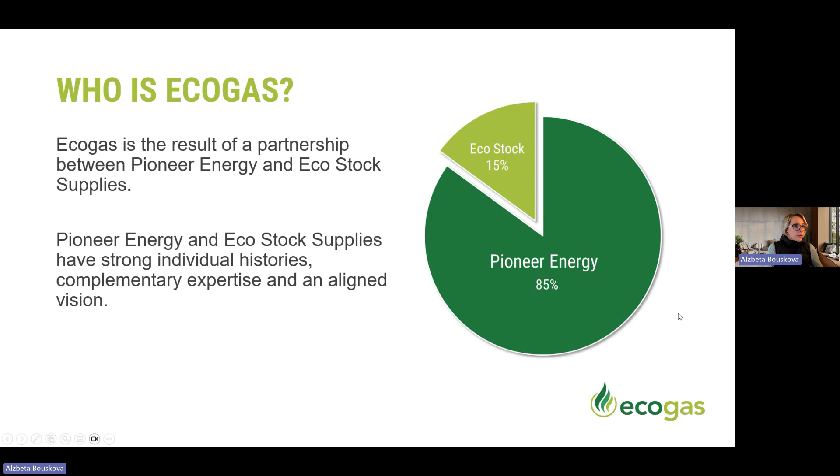So what actually is anaerobic digestion? Anaerobic digestion is a very ancient process, and it's very similar to what's happening in cow stomachs, but essentially it takes organic waste, food waste, and a rule of thumb here is anything that you would feed to an animal or a human. So that excludes wood. Not many animals actually eat wood. So anything green, or that has been produced by animals or grown, is put through this process of anaerobic digestion.

That's a biochemical process, and the process is very clever because it is able to convert 95% of the latent energy in that food into biogas, and essentially retain all the good stuff, the nutrients and the trace elements that the food contains, which is converted into a liquid fertilizer. So an extremely efficient process.

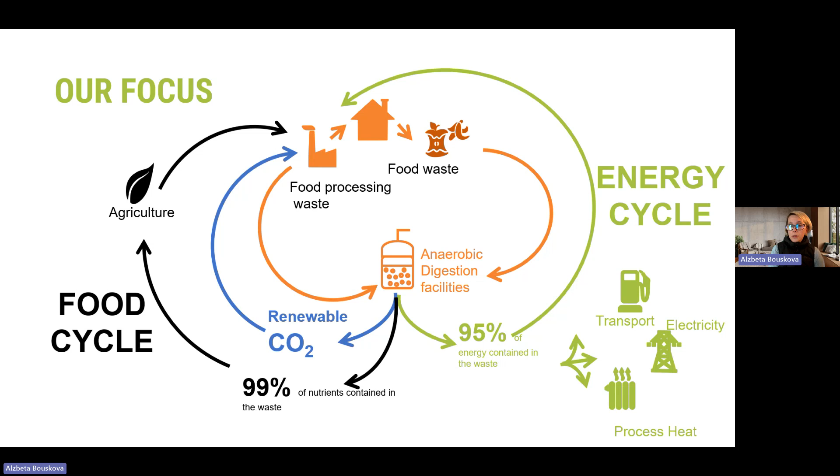And the biogas is a very flexible fuel and can be used in multiple ways: upgraded to transport fuel or electricity, or directly used in process to generate heat. And bio CO2, or renewable CO2, is also a byproduct of the digestion, and can be used as well to replace fossil-derived products.

So what anaerobic digestion essentially does is it really shifts the dial from our BAU process, which is essentially landfilling. When food waste goes to landfill, it produces greenhouse gas emissions, converts into methane with a similar type of bacteria as the anaerobic digestion. But because landfills are open until they are finished and you can cover them, all of this methane essentially percolates through the landfill and gets released into the environment.

We have made some transition into composting. So composting sort of avoids the landfill emissions to an extent, and produces compost, which is obviously a valuable product. And where anaerobic digestion plays a good role is that it shifts the dial even further into the avoidance space, because it produces liquid fertilizer and it produces biogas, which can then be used to replace fossil-derived products and create that avoidance space.

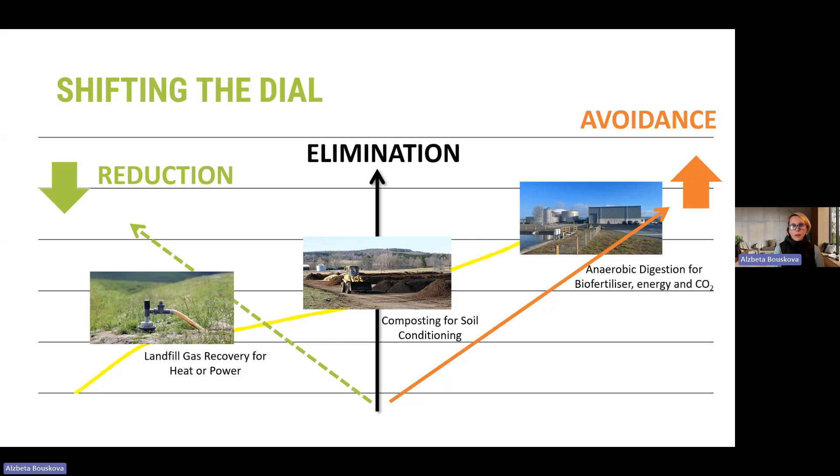And one thing that is really fascinating about anaerobic digestion is that it sits at the intersection of 3 different sectors: the environment, the energy sector, and the agricultural, the primary production. And as fascinating as it is, it's also probably a weakness of the process, because regulators or policymakers usually play in their own sector, and it's very hard for people who set policies to step out and really look at it holistically and say, right, we need renewable gas, but for that to be enabled, we need waste to produce the renewable gas from, and they have to cross the boundary of their own sector into the other sector.

So anaerobic digestion professionals have always struggled with conveying the message, because people often look at it from one lens, and they miss out on the other attributes and the other benefits, which makes perhaps anaerobic digestion less attractive, unless you look at the whole spectrum.

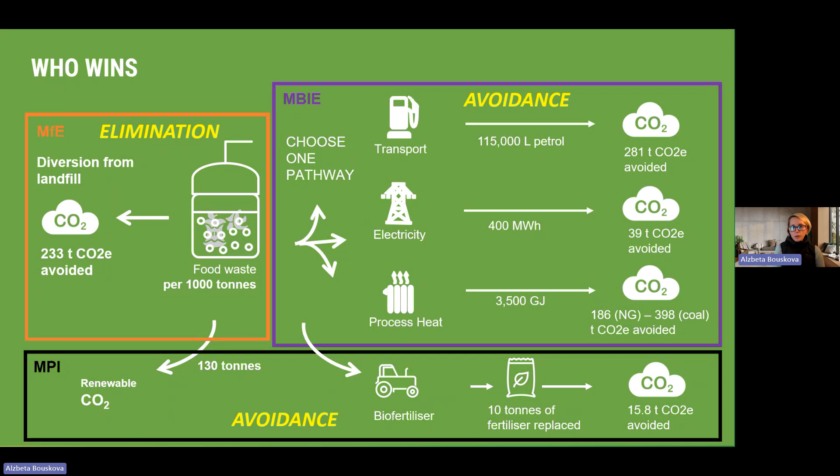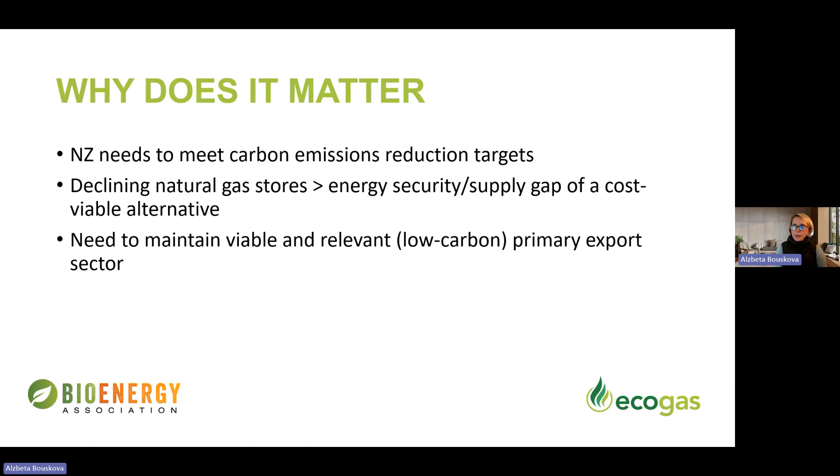And so why does it matter? Why does anaerobic digestion matter in the New Zealand context? We've got some serious emission targets to meet, and I've seen the lineup of people that were registering for this webinar, so I wouldn't be telling you how to suck eggs when you know that the natural gas stores are depleting, and we need a viable alternative. And also for our primary industries, we actually need to transition to a more circular and lower carbon economy for our primary producers to remain relevant on the global market. And so these I see are the 3 key drivers for why I believe anaerobic digestion should be considered more seriously.

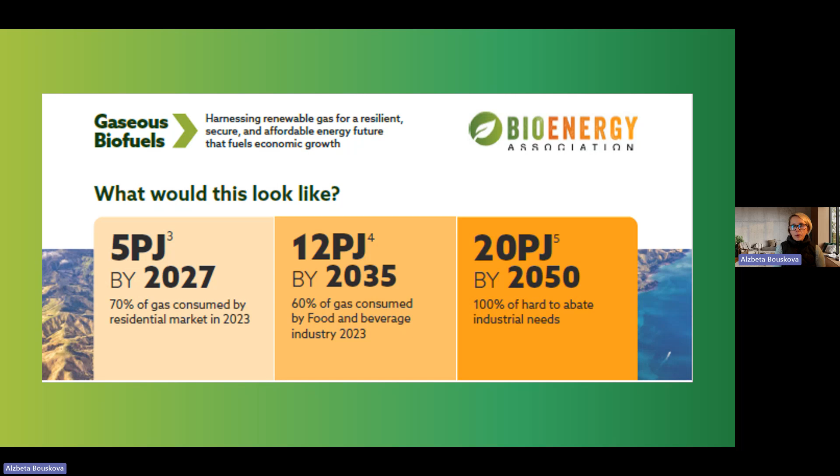And we've done some work with the Bioenergy Association to quantify what the potential is. And we believe that realistically there's a minimum of 20 petajoules of renewable gas that can be produced. We split it into 3 stages, and with some serious actions from the 3 different sectors, and a little bit of a tailwind from the government behind us, I believe we can seriously achieve these targets.

A little bit of a trip into the history. Not many people know that New Zealand was one of the first countries in the world that was converting biogas into vehicle fuel. Back in the 1960s and 70s, the government set up a research group down in Dunedin and Invermay that were tasked to convert agricultural waste into vehicle fuel. So they were running the first biogas upgrading machines and running tractors and vehicles on biogas essentially.

I find that a fascinating fact, especially when you then look at how the world has embraced this technology and run with it, whilst New Zealand kind of stayed behind or was left behind with all this amazing development early on. But what really drove the uptake of anaerobic digestion in the world were subsidies. A lot of the countries recognized that in order to build that biogas market, they will have to incentivize the market through subsidies.

And the biggest driver for biogas production in the world is the production of renewable energy. Whether it's renewable electricity or renewable gas, it's the energy aspect of it. And so a lot of countries, UK, Germany, put subsidies on the renewable energy produced from biogas plants, and that really drove the big growth of the sector.

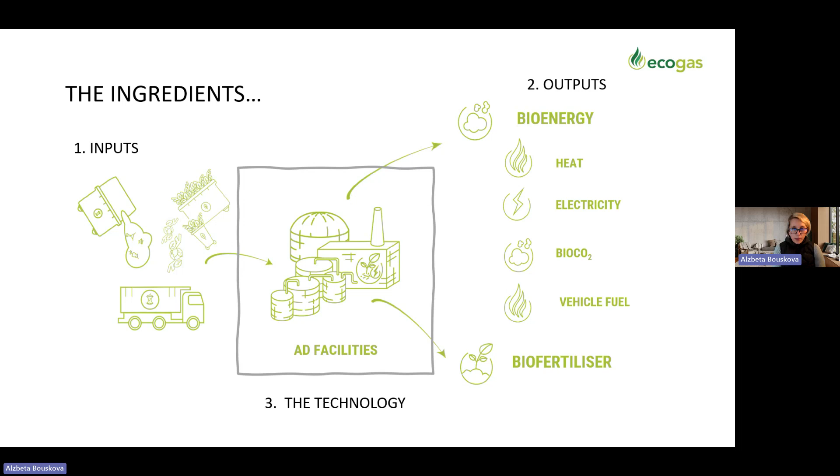What makes or breaks a successful AD project is actually having a security of supply of the feedstock, and then having a security of offtake for the products that the plant produces. And as we mentioned, there's the bioenergy sector, there's the energy sector, and then there's the fertilizer space as well. So globally, I spoke about the subsidies. A lot of the countries put a lot of weight on the outputs, and that's how they drove the uptake of anaerobic digestion.

In New Zealand, on the other hand, the business case kind of stands and falls on the inputs and being able to charge a gate fee for the inputs that are being processed in the plant. Probably 2/3 of the business case will be around the gate fees, and the energy and the fertilizer will be in the last third. And it actually underpins why we haven't had anaerobic digestion plants built for the last how many decades.

It's essentially because the landfill disposal cost historically has been extremely cheap, and it's only been in the last few years that the landfill levy has increased and landfill disposal cost has increased to a level where a medium-sized plant can compete with those gate fees. So at this stage, with the landfill levy increasing, I dare to say that we finally reached the tipping point where business cases for anaerobic digestion plants can be built on gate fees lower than what landfills are charging for commercial food waste.

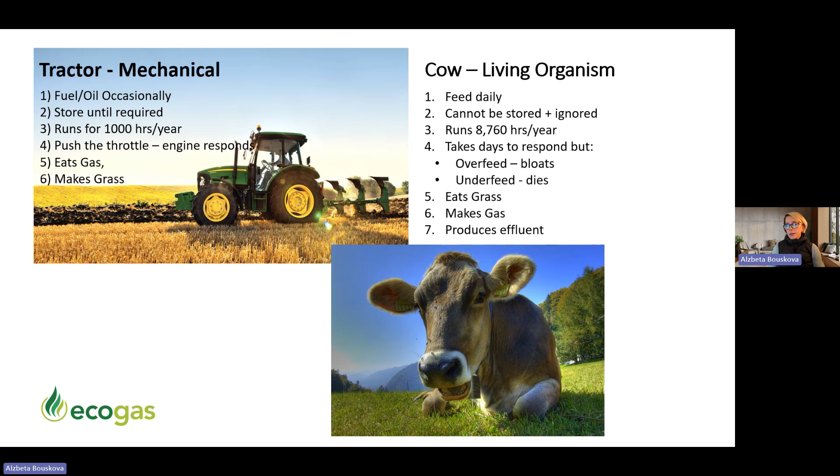And so it eats food and it makes gas and it also produces effluent. So I think the parallel is actually very matching in this case, and it kind of shapes the way you need to think about what you would bring into your plant as a feedstock and how you're going to deal with the products, obviously. It's a very powerful system.

So the methane producing organisms are actually one of the oldest microorganisms on the planet. They've been around for millions of years, and they survived all the different eras, and that's what has made them the way they are. They are very slow bacteria, but they don't need much energy to sustain themselves. They take 5% of the energy from the food that they process, and the rest is excreted as biogas. So they're very low energy needing,

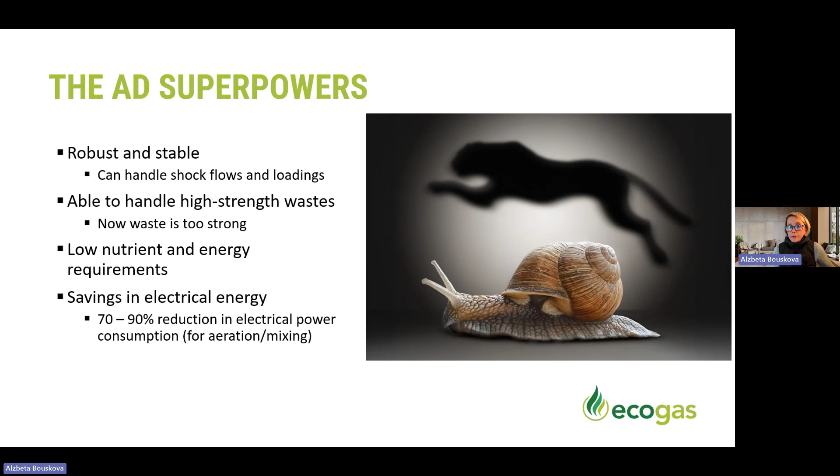and they don't need much to sustain themselves, but they are very powerful in that they can process very concentrated waste and turn that into useful products. And I'll keep carrying on with this parallel with the cows, but anaerobic digestion is essentially a 3-stage process which has to run in complete symbiosis for the system to work.

So the first step is hydrolysis, where the solid waste breaks into liquid components, and the next stage is acid formation, where the liquid components get broken down into volatile acids or organic acids. And then in the third stage, the methanogens take the volatile acids and turn them into biogas.

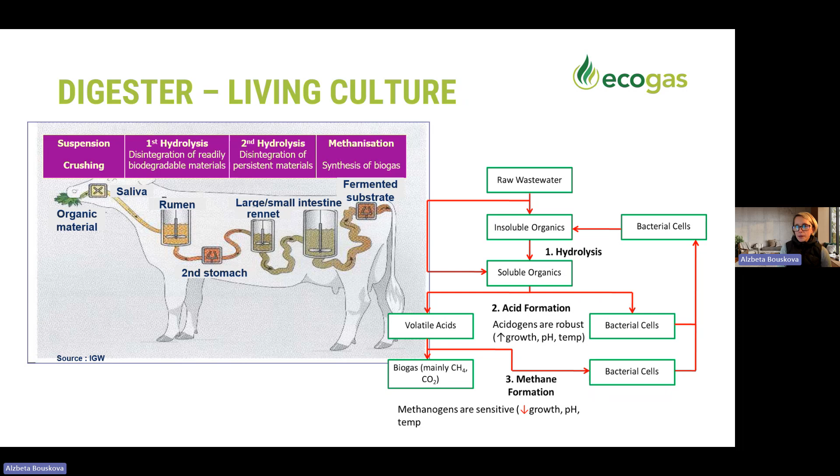And if you look at the cow, your mouth is the first part. When the food waste comes into the plant, you have to macerate it. You need to turn it into a slurry, that's what happens in the cow's mouth, and then it goes into the rumen and into the stomach. And at the back end, you obviously get the gas, and you get the effluent. So it's really important to understand that it's a 3-stage process, but you need to keep that process in balance. And the way you do that, I suppose we'll talk about a little bit later.

To give you a bit of a taste for how much energy different feedstocks contain. Fats can produce the most amount of gas per ton of dry matter. Fats produce about 3 times as much gas as protein or carbohydrate, so residual fats are what you will get the most out of. There's a limit to how much fat you can feed into the system, a little bit like humans, but we'll touch on that later. And then food waste has got a high gas yield as well, and then it moves towards the likes of green waste, which has got a lower gas yield.

And what's almost surprising is that manure has got a very low energy yield, because it's already been through one digestion system. So the anaerobic digestion plants treating manure are just trying to squeeze the last bit of biogas out of that already digested product. But it's the sheer volume of manure being produced in European countries that needs to be processed, and that volume still justifies generating enough biogas to make a viable business case. So that's why there's a lot of anaerobic digestion plants treating manure in Europe.

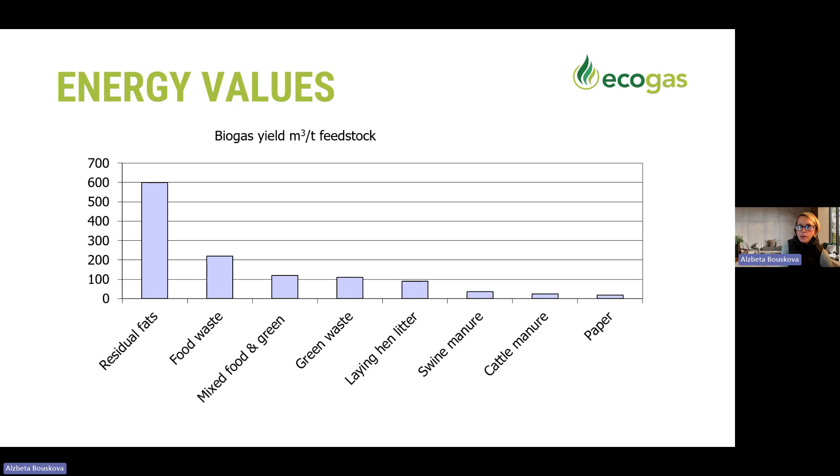And it is actually all about the feedstock. Because what your feedstock is made up of influences how much biogas and what the quality of the biogas you produce is, what the fertilizer is going to look like in terms of nutrients, and how efficient your system is going to be. So if you get your feedstock out of balance, you'll be struggling. The plant will be struggling.

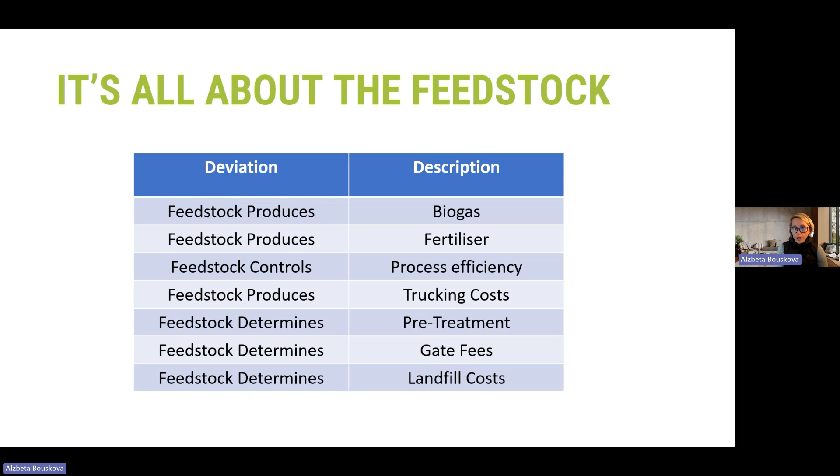Also, the distance of the feedstock. Obviously, you've got the trucking cost as well to factor in, and it also defines how much you need to pre-treat the waste. If you've got commercial waste, you have to depack it. If you've got energy crops, you have to store them for a big part of the year. So that kind of stuff is also determined. And last but not least, it actually determines how much you can charge for the gate fees, and how much you're going to have to dispose of at the end.

So at EcoGas, we've put this little graphic which kind of explains it in a graphic form. But what we are trying to say here is that all the fatty stuff produces a lot of biogas, and the meat and the milk drives the nitrogen in the liquid fertilizer. And this is how it's explained a little bit better.

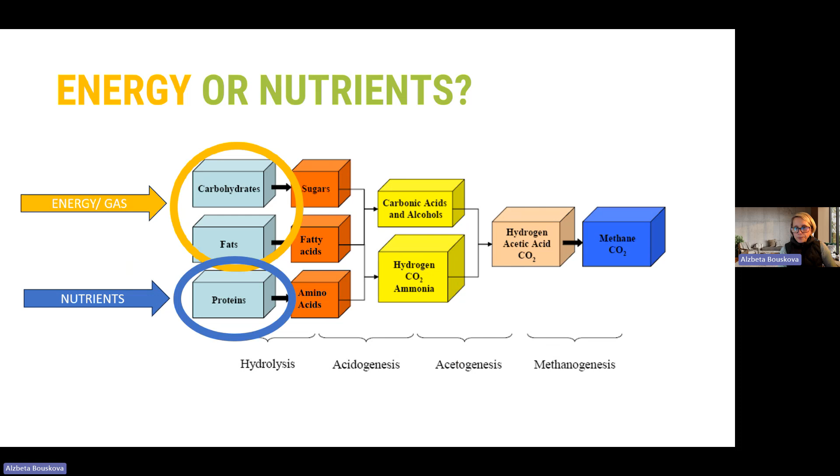So we've got the 3-stage process, or it's drawn as a 4-stage process here. But the carbohydrates and fats, they are purely just energy. They are energy in a compact form, and the proteins are actually what has got the nutrients. So it's got the nitrogen, it's got the sulfur, it's got the phosphorus, and that's what influences the fertilizer. So you need to get a good balance of these 3 food groups to get your optimal outcome at the end.

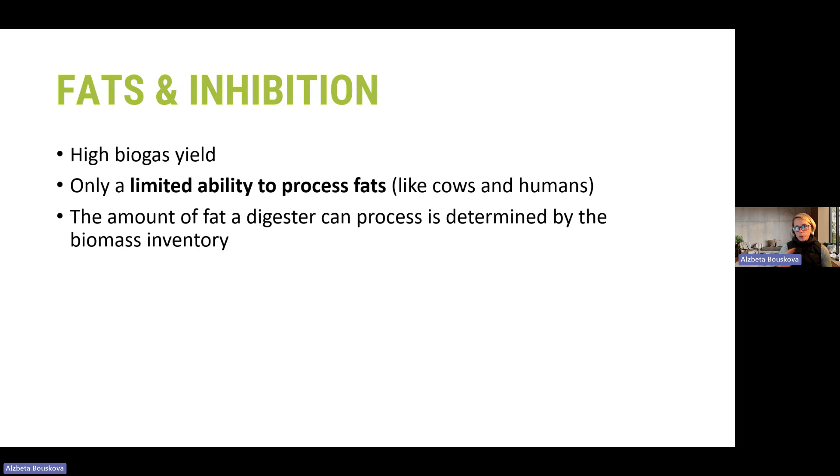And I mentioned the fats. They yield a lot of gas, but there's a limit to how much you can feed into a digester, and it's basically driven by how much bacteria you actually have in your system. So it's a pure correlation: you've got this much digestate in your tanks, and you can only feed this much fats. There's a level to which they can adapt, so you can run a keto diet or a very fatty diet, but you're treading a fine line between where you get super high gas and where the inhibition starts. And it's a byproduct of the breakdown of the fats that actually inhibits the bacteria. It's a long chain fatty acid.

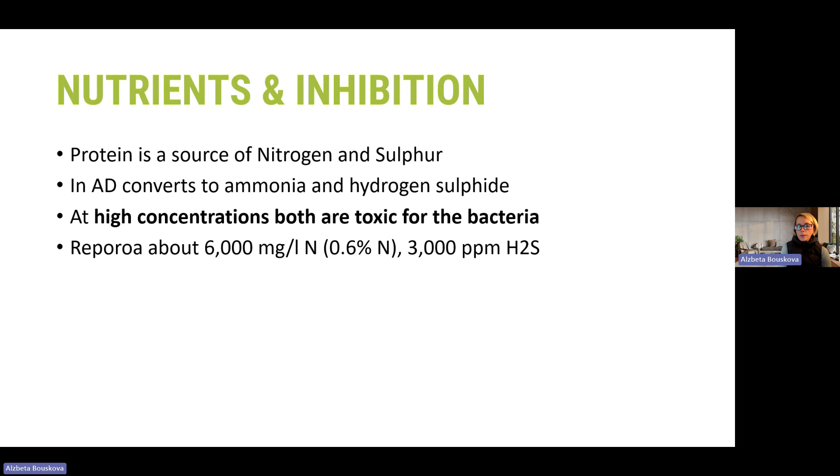And it's a similar story with the nutrients and with the nitrogen. So protein breaks down and makes nitrogen as ammonia, and sulfur as hydrogen sulfide. And both of those, if they are in too high concentrations, can also inhibit the bacteria. So it's hard to feed pure protein into a digester if you don't have means of reducing the ammonia and the hydrogen sulfide in the product, so you stay below the limit.

And so what's really the success behind a good digestion process is having the right amount of bugs for your feed. We call it a food to microorganism ratio, or organic loading rate, and then having a really good mix, so the bugs have access to the feedstock. So in the digesters that we have in Reporoa, mixing is one of the most critical things in the whole system, because you always have to make sure that your tanks are well heated and well mixed, so you don't have pockets of highly loaded bacteria where they are dying because they've been overwhelmed, and half of the tank not doing anything. So mixing is one of the most important things in these anaerobic digestion plants.

Temperature plays a big role as well. Most of the anaerobic digestion plants are running at mesophilic temperature, which is between 30 and 40. It's kind of the human body temperature of 37, 38 maybe. Or some plants also run at thermophilic temperatures, which is around 55 degrees. In theory, it makes more gas, but it's also harder to control, because you have to be really onto it and maintain that 55 degrees, because if you allow the temperature to drop, your bugs will die. And so it takes a lot more logistics and admin to look after a thermophilic plant. If you can do it, it yields a little bit more gas than the mesophilic plant.

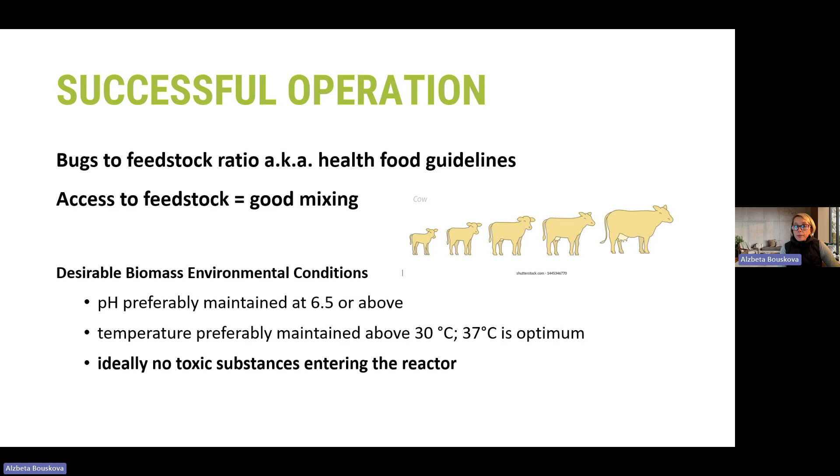And the optimum pH for digestion is around the neutral zone, so between 6.5 and 8.5. And ideally, you will look after your bugs so you don't feed anything toxic. And so on the topic of toxicity, there's toxicity, which just kills the bacteria, and then there's inhibition. Inhibition is where they get a bit flustered, and they don't operate to the best of their abilities.

And the common sources of toxicity in digesters are cleaning chemicals. So especially if you are processing industrial waste or industrial byproducts, if there's a spill of cleaning chemicals, you could end up inhibiting your bacteria or wiping out your digesters. Heavy metals, it's not so common in food waste digesters, but it's very important to look at that when sewage sludges are being treated, because heavy metals could be quite high in sewage.

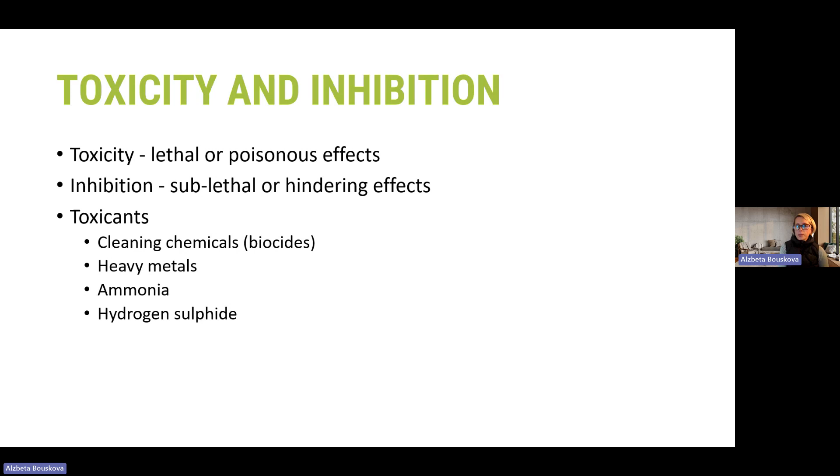And then we spoke about the ammonia and hydrogen sulfide. So these are the main groups of toxicants for anaerobic digestion. And just quickly touching on how would you know that your system is out of balance or is being inhibited. There's this little trick where the methanogenic bacteria, although they're ancient and have survived a lot, they're the most sensitive of the three groups in this whole anaerobic digestion process.

So if the system gets out of balance, you will know that because the methane producers will start dropping out or being a bit behind. And this is where your volatile acids will accumulate and they'll start showing up in your system. So we use the volatile acids as our indicator of the system being out of balance.

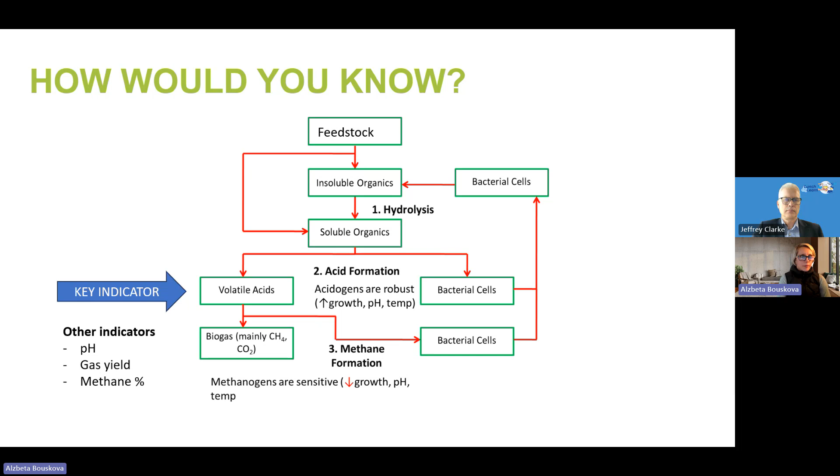And I think I'm just about at the end, Jeffrey. I saw you coming in. Yeah, we've got a couple of questions, so as long as we've got room for a couple more. A couple more slides, a couple more questions. Yeah, why don't you finish off and we'll.

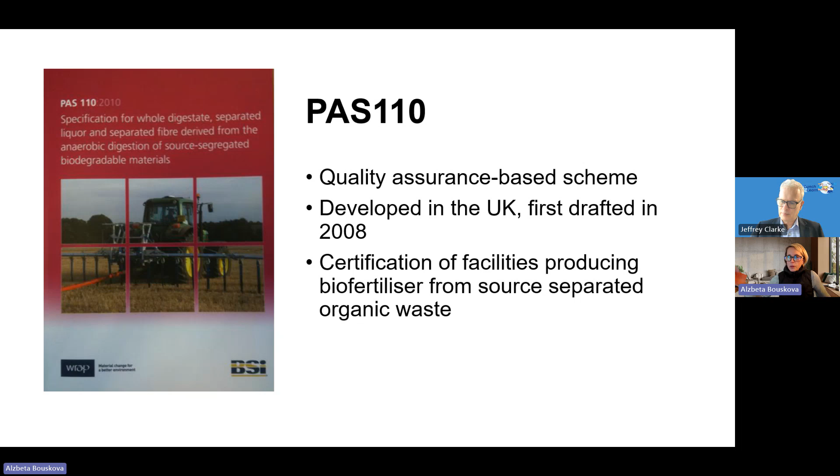Yeah, just to give a bit of a tip of the hat to PAS 110. It's a standard that was developed in the UK that is kind of a guidance document on how to run an anaerobic digestion plant successfully, and it gives you what you need to look out for and what process you need to have in place so that your product is consistently good. It's got some plant design requirements, digestate sampling, and the Bioenergy Association is now working on essentially a New Zealand version of the PAS 110.

But yeah, that was a bit of a race through the end, but hopefully I've covered everything. Look, that was fantastic. That was a great overview of what anaerobic digestion is and how you guys are using it at EcoGas. And we've got a few questions through from people that I'd like to run through here.

Two relatively easy ones. Can the sludge from a wastewater treatment plant be used to produce biogas? Yes, absolutely. It's probably the most common use of anaerobic digestion in New Zealand to date. So we've got a few wastewater treatment plants in the country that make biogas. So absolutely can. Super. And more specifically for EcoGas, are there any future plans for another plant?

So we are in the process of building one in Christchurch and just getting through the resource consent stage right now, but design is underway, and hopefully we'll have a chance to do a third one in short succession. But that's still in development, to get it to the resource consent process. And how long did it take from go to whoa to actually get the Reporoa EcoGas facility up and running?

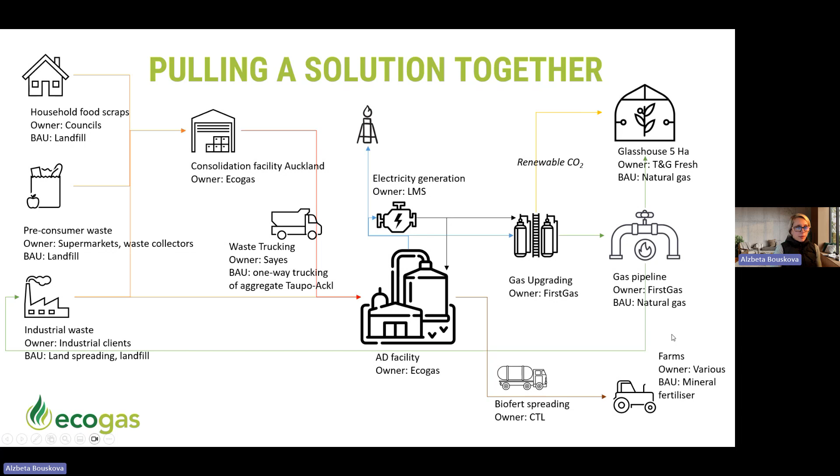The fertilizer is spread by a local spreading company on the local farms, and used as a substitute to mineral fertilizers. This is our consolidation facility in Auckland. It's just a big shed with lots of bunkers where the trucks drive in and they unload, and we load it on the line haul trucks.

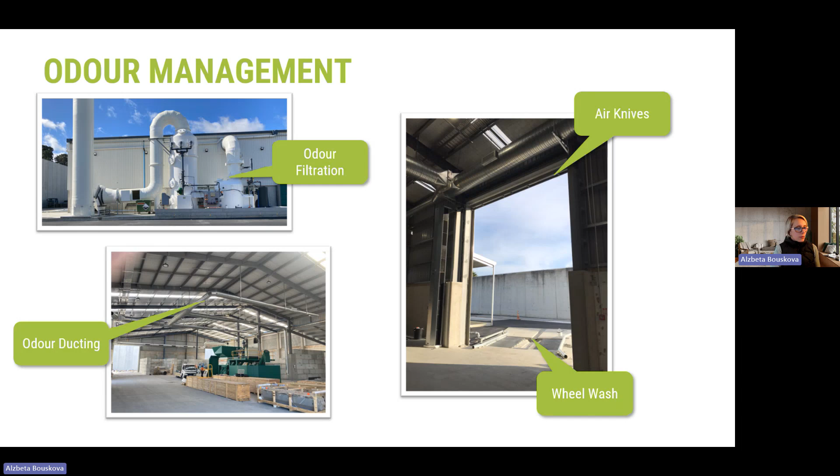It has to be super ventilated and odor managed because it's sitting in the middle of a light industrial zone. So we've got a monster of a scrubber there, and some extra features on minimizing the impact on our neighborhood. But Reporoa, again, we've got a big shed in the middle, which is the only place where the food waste actually sees the daylight.

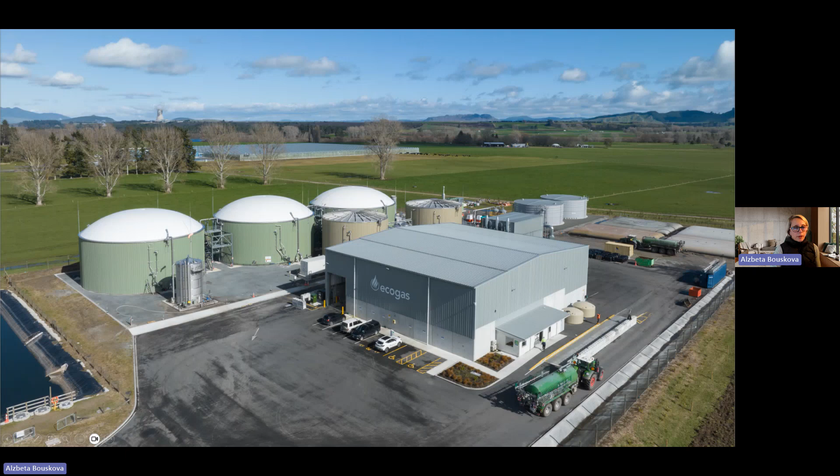This was where the trucks come in and they unload into this shed, and then the waste gets processed into a slurry, and that gets pumped into these digesters back here. These big bladders have now been replaced with the First Gas plant, and so I need to update my project.

But line haul trucks back into the facility, they unload, and then we use the front end loader to feed this depacking system, which is essentially a hammer mill process that sort of rips open any packaging and by centrifugal forces separates light plastic and other packaging from the organic watery waste, and that gets processed into this slurry. It looks a bit like a smoothie, very green smoothie, and that goes into the digesters.

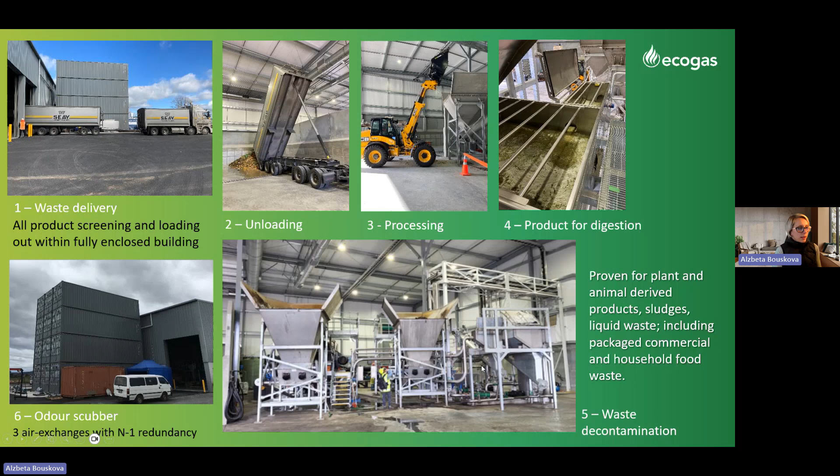Again, we've got a big monster of a scrubber to pull the air out of this processing hall and clean it before we discharge it into the environment. And then we've got digesters. The liquid product gets pasteurized before it goes onto land to keep it safe for the humans and the animals that meet with that product. And then gas gets scrubbed, and we've got a flare for disposal of any excess gas.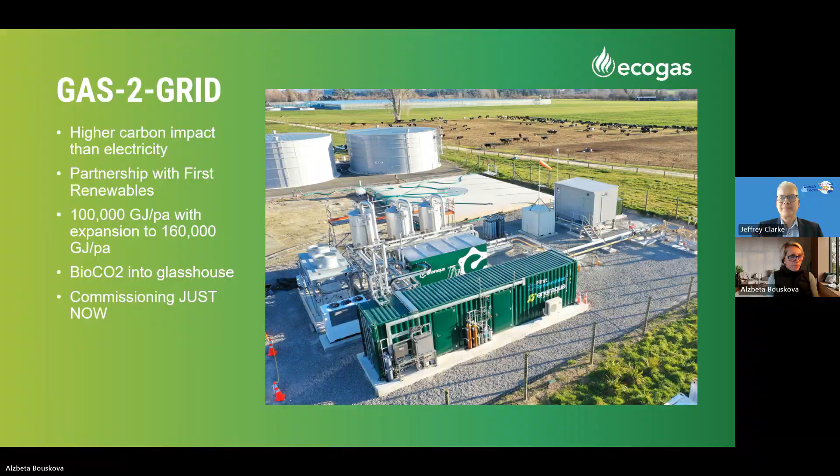We'll be having more of these presentations as we go along, and there's hopefully quite a lot of exciting developments in the biogas and renewable gas space over the next year. So it really does feel like we're at a bit of a tipping point for getting traction on this. We know we've got the Minister of Energy interested in the topic. And several of us are working to increase that interest. So it does feel like an exciting time for renewable gas, and well done to you and Ecogas for what you've managed to achieve so far.